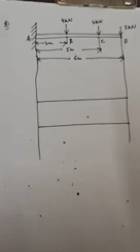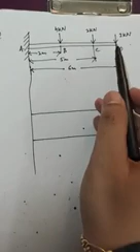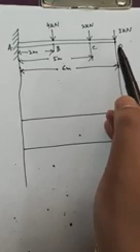Now students, let's solve this question. This is a cantilever beam. Sometimes a statement is also given in the question: a cantilever beam AD of length 6 meters carries 3 point loads from the fixed end - 4 kilonewton at 2 meter, 3 kilonewton at 5 meter, then 3 kilonewton at the free end. So this is the diagram of a cantilever having 3 point loads.

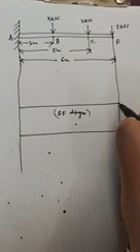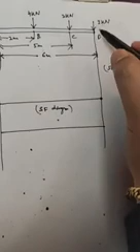Now we'll draw the shear force and bending moment diagram. First of all, the shear force diagram. We'll start from point D. How much force is acting? 3 kilonewton. So the shear force at point D will be equal to 3. Since the load is downward, we'll take this to be positive, plus 3 kilonewton. This is the shear force, 3 kilonewton.

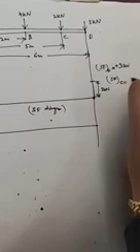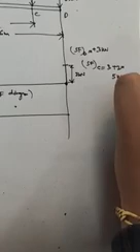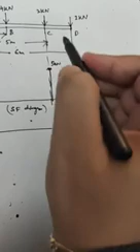Then shear force at point C will be equal to how much? Consider the right hand side portion. How much load is acting at point C? 3 downward plus 3 downward, that is 3 plus 3, this will be equal to 6 kilonewton. So at point C, the shear force will be equal to 6 kilonewton. Since C to D there is no other force, it will be a straight line, and positive since this is plus.

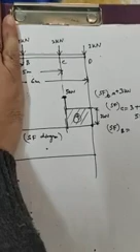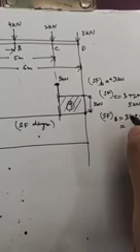Then shear force at point B. At point B, consider the right hand side of the beam. How much force is acting? 3 downward, 2 downward, and 4 downward. 3 plus 2 plus 4. Total force will be equal to 9 kilonewton at point B.

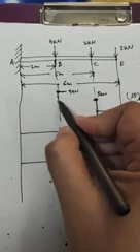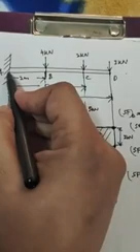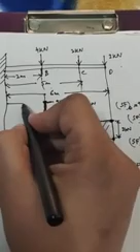So from C to B, no force acting, it will be a straight line, but at point B, it changes to 9 kilonewton. So see that the shear force is changing at point D to 3, then no load, constant, then at point C again changes to 5, then B to C no load, again changes at point B to 9. And at last, shear force at point A will be equal to total load 3 plus 2 plus 4, this will be equal to 9 kilonewton. So this is all positive. This is the shear force diagram. Clear?

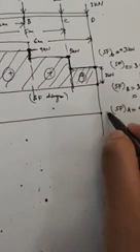To come to the bending moment diagram: at the free end, the bending moment is always 0, and at the fixed end, the bending moment will be maximum. Now, a relation - if this is a straight line, this will be an inclined line. And how much will be the bending moment at point C?

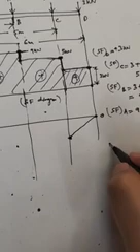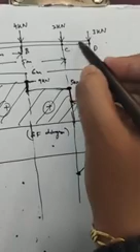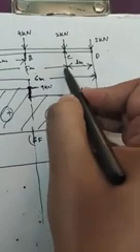The bending moment at point C will be equal to how much? Consider the right hand side portion only. Due to 2 kilonewton at point C, the bending moment will be 0 because this is at point C. So there will be only one load, 3 multiplied by this distance. How much is this distance? This will be equal to 3 into 1 meter - this is 3, 6, this is 5, this is 1 meter. So this will be equal to 3 into 1 meter, that is 3 kilonewton meter.

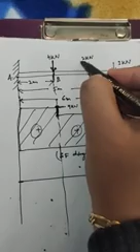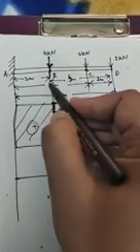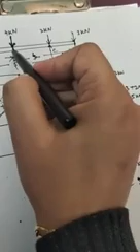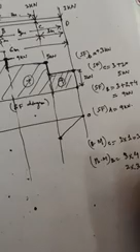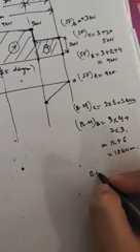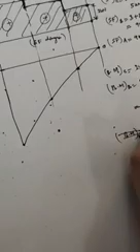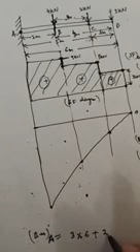Clear? So last, bending moment at C - again this is a straight line, this will be inclined line, and bending moment at C this is a straight line, this will again be an inclined line. So last, bending moment at A will be equal to this force multiplied by this distance, that is 3 into 6, plus this force 2 into this distance, 2 multiplied by 5, plus this force 4 into this distance, 4 multiplied by 2. This is 18 plus 10 plus 8, this will be equal to 36 kilonewton meter.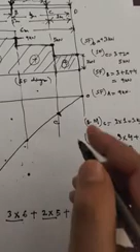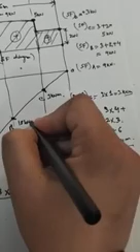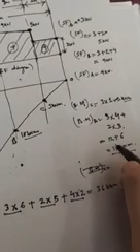So at point C we have the bending moment of 3 kilonewton meter, at point B we have 18 kilonewton meter, and at point A we have 36 kilonewton meter. Since all the forces are downward, therefore all these bending moments are negative, minus. So this is the shear force diagram and this is the bending moment diagram.